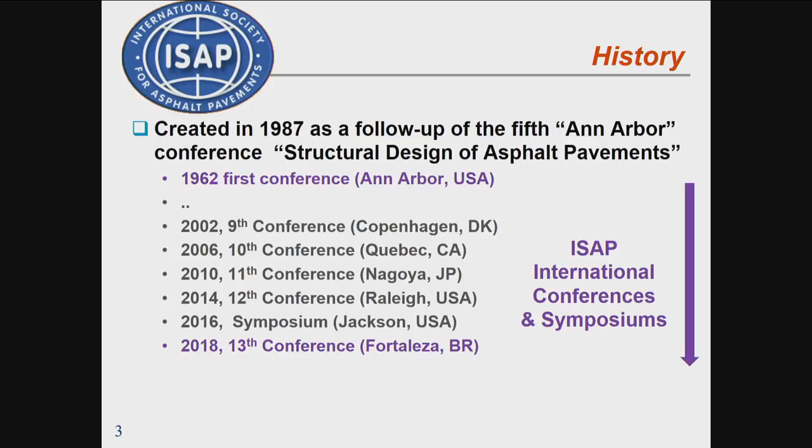These are events, sort of like the Olympics, every 4 years, or like the Soccer World Cup. But there are also some symposiums in between. The last conference was in Fortaleza, Brazil, and the next one, a symposium, will be in San Jose, Costa Rica.

That will be in 2021, not in 2 years. If you want to know more, we can discuss that later. Then there will be the 14th conference in Montreal, Canada. So as you can see, over the years this conference has been to Europe, US, North America, South America, and Asia. It's really covering the globe, and maybe one day Africa, who knows.

So a bit about the mission: it's to encourage research and technology exchanges in the field of bituminous materials and structures. There are a number of things around this.

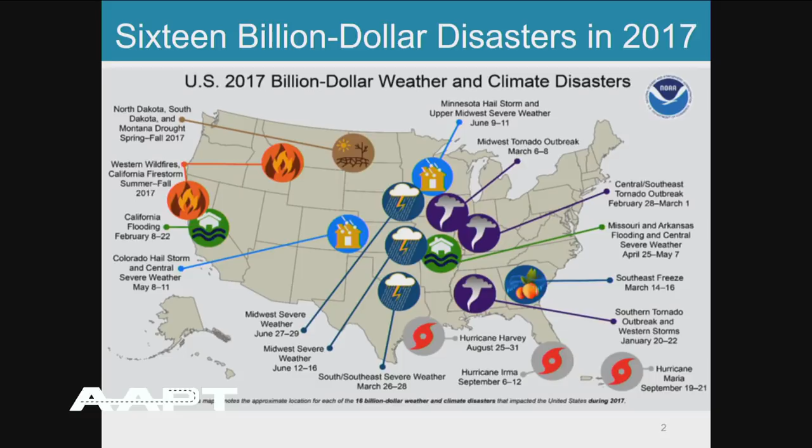It's not earth-shattering that we all know that environment does impact our pavements. This is something we've known for some time, and a recent study data mining the LTPP database found that 36% of the damages was attributed to environmental features. So when we design pavements, we do consider the environmental parameters. However, in the past, we've always assumed that this is a historical trend and it's been pretty constant. And in the future, we're finding that this trend may not be true.

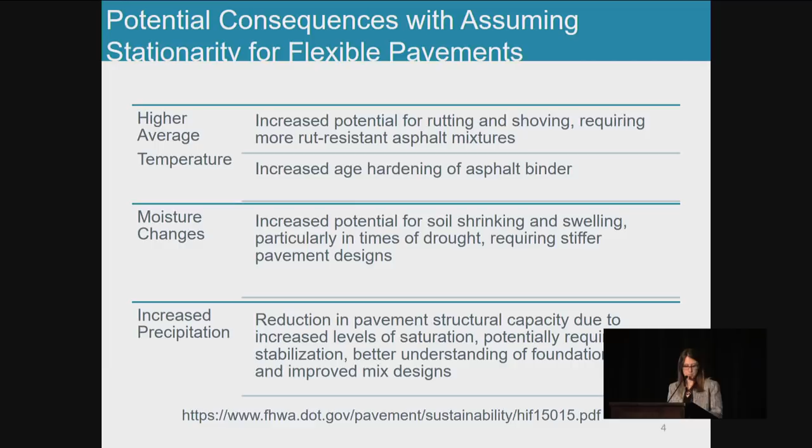If the climate were to change drastically, and our assumption that these historical climate trends were not flat and consistent, considering the lifespan of the pavement, with higher temperatures we may see some more rutting. With moisture changes, we may see issues with soil shrinkage and swelling. And then with increased precipitation, we may need a stronger base or foundation because we may lose some structural capacity for our pavements. So here's just a few issues we could expect if our climate changed drastically.

In this presentation, I'm just going to go briefly over FHWA's resiliency program and policies to give you an idea of what we have in our policies right now, identify some of the available resources that are out there for you all to use and share, as well as highlight some future ongoing projects specifically related to pavements.

So starting with our program and policies, FHWA's Planning, Environmental and Realty Group is really who manages the resiliency program. But resiliency is well immersed in not only our strategic plan — the strategic plan at the DOT level says that we should increase the effectiveness of ensuring that our infrastructure is resilient enough to withstand extreme weather — but it's also in an FHWA order, and that order says that all of FHWA should incorporate resiliency into our program when we consider program funds, projects, and research.

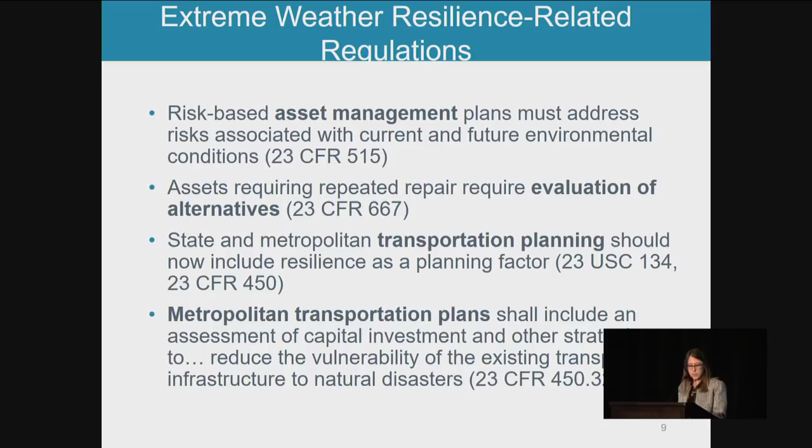Not only that, the resiliency and consideration of future environmental impacts is also in our regulations. The most current regulation that has incorporated future climate is the asset management regulation, which requires transportation agencies to put forth a transportation asset management plan. In that plan, you must not only consider the risks that climate could pose, but also include that in your life cycle cost for managing your assets, and pavement is one asset you must look at. When you consider the various risks, there could be an immense list of them, including political changes, but climate is also called out in the regulation as something agencies should consider moving forward.

As a result, the Office of Environment and Planning has developed a program to integrate resiliency into transportation projects. They're looking at it from a holistic point of view, wanting to integrate resiliency not only into the planning, but also the project level, design level, as well as operation and management. There's a lot of resources, and a big team that works on how this should be done.

From the planning level, they're creating a guideline for agencies putting together plans to incorporate resiliency into their approach. They have found that it's important to identify and call out resiliency if you want success incorporating it into your program. They're also looking at asset management, specifically the transportation asset management plans that all states are required to submit.

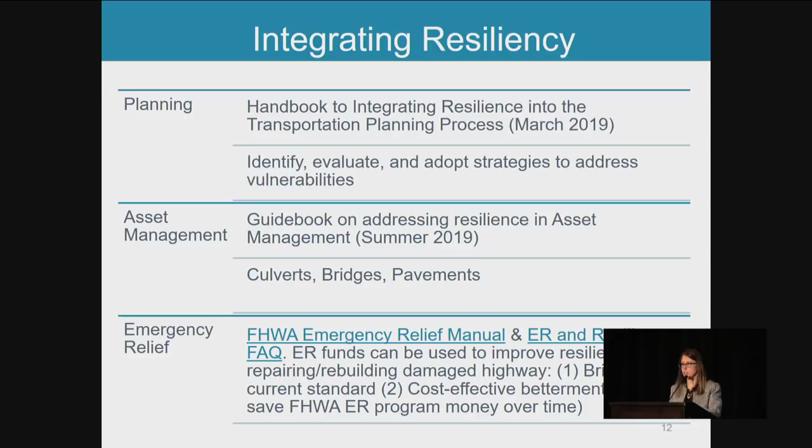All of these projects I've mentioned are spread across the U.S. They have worked in various regions and conducted various pilots, so I encourage you to check out the resources available on the website if you want to dive in deeper. Moving forward, I'd like to highlight some pavement resources specific to asphalt pavements, spanning from case studies to tools as well as guidance.

The first set of resources were case studies conducted across the United States. There were several case studies looking at how to incorporate resiliency into the project level or engineering design. There are two case studies I'm going to highlight focused on pavement type issues: one done here in Texas, and one in Maine.

The main lessons learned in Maine: they did a vulnerability assessment of their assets and identified that the future climate would likely be warmer with shorter winters. This is important because Maine had higher load premiums for trucks in the wintertime due to extra strength from frozen ground. They found they were very vulnerable to changing temperatures, as this season was getting shorter, meaning they might have to get rid of this premium. If they didn't, it could cause damage to their network, but getting rid of it would also have a huge economic impact on the trucking industry there. That's what they found out in the Maine study.

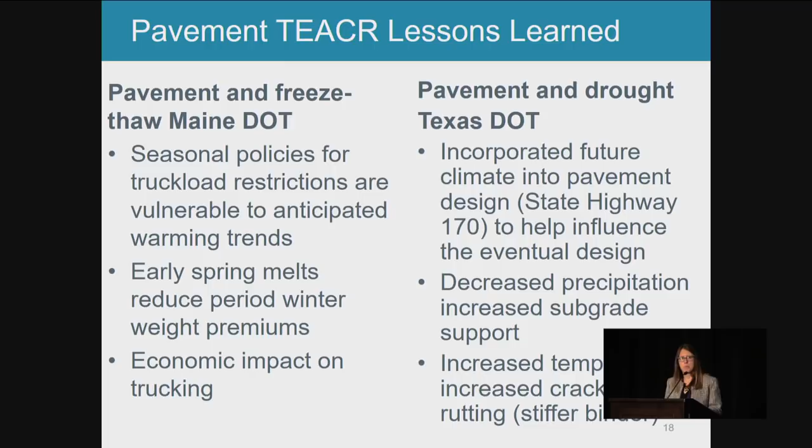They also found that temperatures would increase, and particularly for asphalt pavements, they found that you may want to use a polymer binder that's more resistant or flexible for the higher temperatures. When looking at this from a network level versus a project level, they were pretty happy because we have technologies that could meet the needs of the future climate, and they're available. There's no learning curve, and the cost isn't that much more.

However, at a network level, they did say that the cost could be significant for a DOT adapting these strategies network-wide. So what can a DOT or agency do?

The first thing we suggest is to monitor your trends. We're lucky that most environmental changes don't really impact pavements within the current lifespan, but we are moving to designing longer life pavements. As we move forward with longer life pavements, that may no longer hold true. In monitoring these trends, if you start to identify certain environmental distresses occurring when you wouldn't expect, we may need to look back at our assumption that historical climate trends are remaining constant.

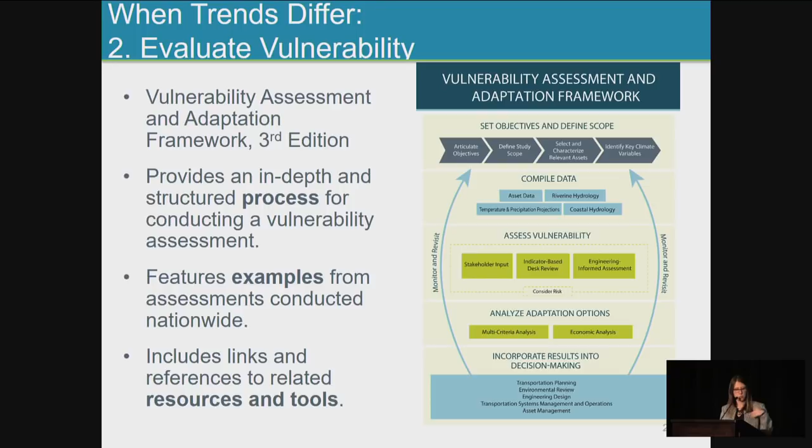One way to evaluate your vulnerability is FHWA's Vulnerability Assessment and Adaptation Framework. It's not just a framework of step-by-step procedures, but it does highlight various tools and resources along the way as you evaluate your network. Some of these tools I will highlight further on in this presentation.

The Vulnerability Network Assessment, oops. I guess you can't, okay, here we go.

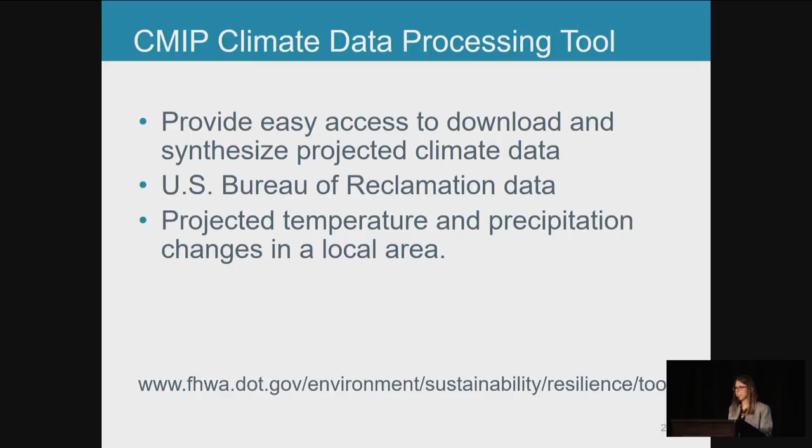Within this assessment, one of the tools it highlights is the CMIP Climate Data Processing Tool. This tool basically data mines from the U.S. Bureau of Reclamation climate data and synthesizes it to the local climate data you could expect for pavement designs. It takes two parameters to get the projected temperature as well as precipitation for your local area, and those future predictions are what you could expect.

In addition, another tool the Vulnerability Assessment Framework mentions is the Vulnerability Assessment Scoring Tool. This tool is an indicator-based vulnerability assessment to help you prioritize your potential vulnerabilities based on your various assets. So it lets you organize what is the most vulnerable area and what is a little bit stronger that you don't have to worry so much about.

If you were to determine that your pavements are vulnerable to future conditions, you need to look at different solutions. FHWA has another tool that helps DOTs with this, called the Adaptation Decision-Making Assessment Process. This is a risk-based approach that looks at life cycle cost, political and regulatory constraints, as well as resilience, letting you look through all of these to figure out which approach would be best for the solution moving forward.

In summary of all these resources, there is a public roads article co-written between the Office of Infrastructure Pavements Group and FHWA's environmental group. It's called Boosting Pavement Resilience, the same as the title of this presentation, that I encourage you to go read, and it will provide links to the resources I mentioned, as well as the Sustainable Pavements Program's tech brief specifically on climate change impacts to pavements. So those are two resources you can reference.

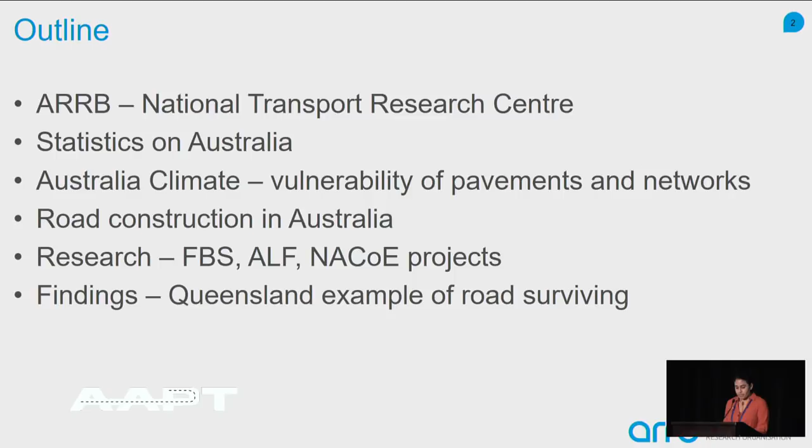The Australian Road Research Board, we're primarily a research organisation. We do some consultancy work. We try not to just sit behind our desks, but get out there and disseminate our knowledge through presentations like this, workshops. We create manuals, we do webinar programs. We also do demonstration and pilot trials. We work in the urban and rural space with all things to do with road transport - sustainability and resilience, structures, network design, autonomous vehicles, asset management, safety, all the important topics. We also have a range of data collection vehicles that go out onto the roads every day, including our integrated system vehicles such as the iPave and ISAP, which are the pavement and surface collection vehicles.

We've actually got offices all around Australia. I'm from Melbourne, which is our head office, and we've just recently moved into a new research facility, being dubbed the National Transport Research Centre.

Here we have world-class laboratories looking at materials research, so it really gets down to the crux of it. We test all the road materials from pavement, asphalt and bitumen. In Melbourne we also have the accelerated loading facility, which there'll be some pictures of later, and at the moment we've got foam bitumen stabilisation testing happening there.

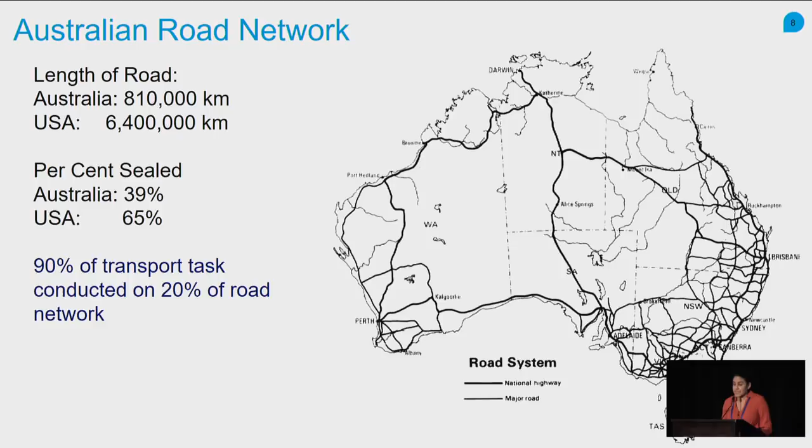The current climate challenges we're facing on our roads include temperature changes. In 2018, the Bureau of Meteorology reported this was our 3rd hottest year on record in the past 10 years, and it's only projected to get hotter with extremely fewer cooler days.

We've also got variations in rainfall, which is one of the biggest influences on our country. We're seeing a trend towards wetter, longer wet seasons, especially across northern Australia, while in central and south Australia we're seeing a lot more dry, high fire risk days and of course drought. With the increased rainfall in the north, we're getting flooding, and it's easy to say this is the most expensive hazard we face in terms of building resilient roads. Climate change scenarios predict floods will only get more intense and more frequent over the years, so it's definitely a key area for us in improving our adaptive capacity.

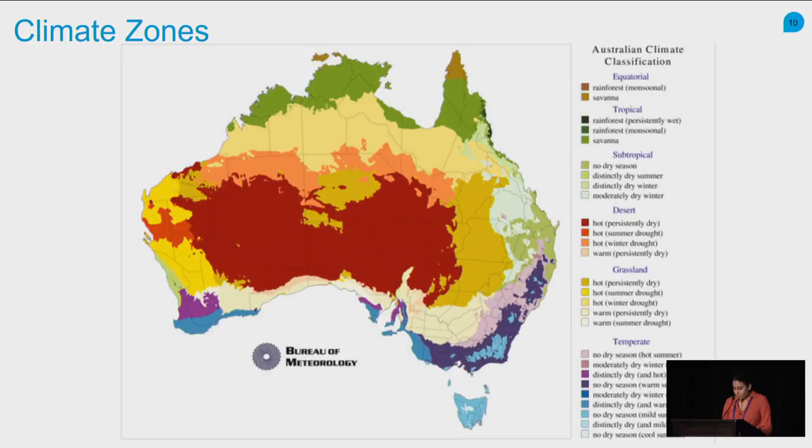We're in fact a case study itself for other countries to consider in terms of climate analoguing. For example, countries with similar hazards are interested in what we're doing as a country in terms of adapting to these impacts. But to be honest, I think we've still got a lot to learn from international sources as well.

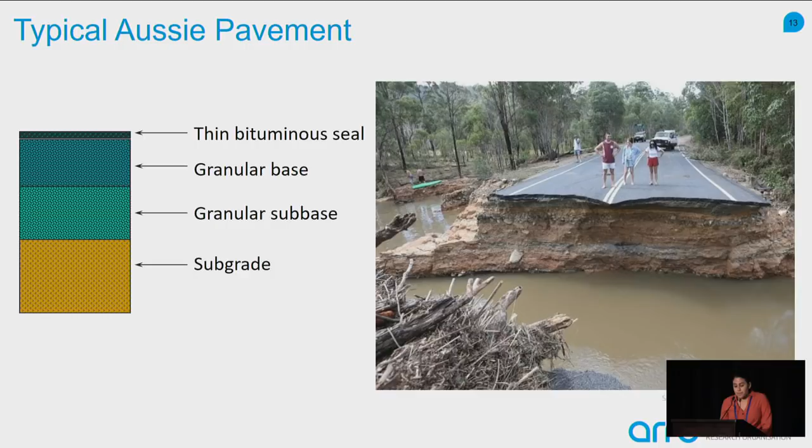The extreme challenges affecting a nation are the ones that occur at the same time. We've also got a low network density with large travel distances from our mines, farms, ports and cities. We've got densely populated urban areas, and on top of that heavy loads with low traffic volume. I forgot to mention earlier that 90% of our transport only occurs on 20% of our network. So although we don't have high volumes of traffic, we do have heavy volumes in certain areas, and we predominantly have light pavements as well.

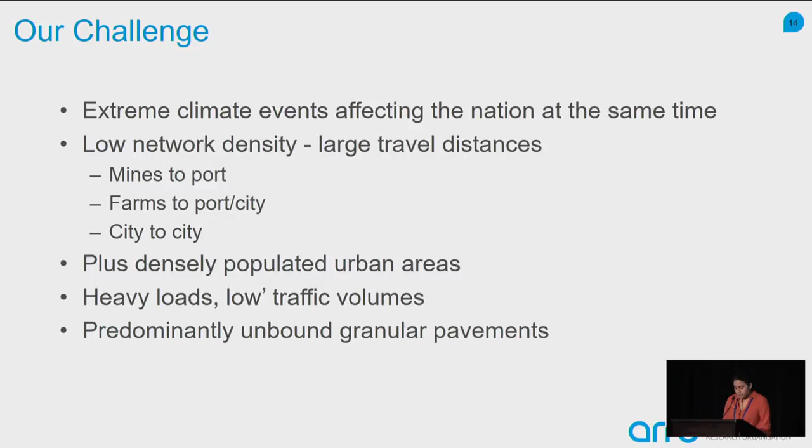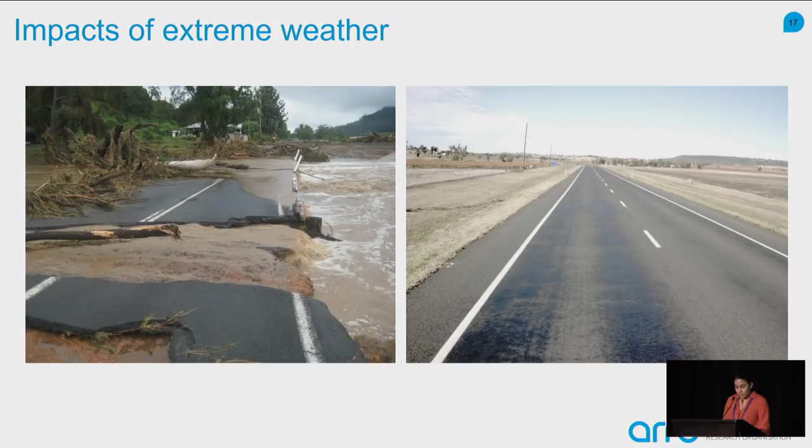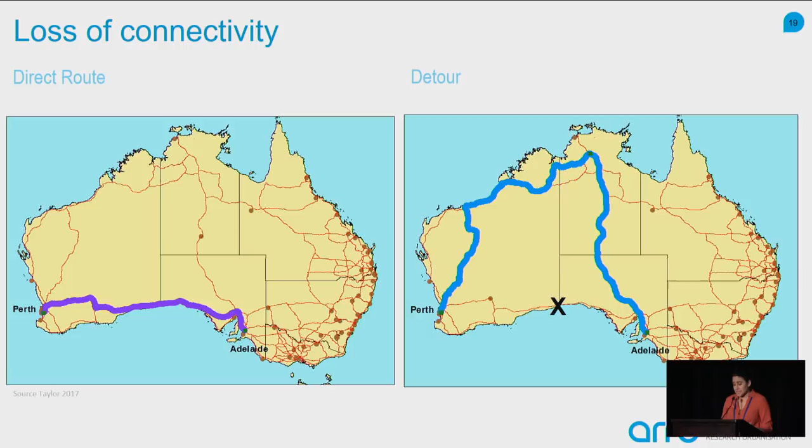So how do we be more resilient, and how do we better cope with our extreme weather events? As Heather discussed and gave a really good introduction, we've got to take this holistic approach to things.

So we've got your planning and design. You want to consider material selection, make sure we're using fit-for-purpose materials more and more. We've got material specifications - from an Austroads perspective, we're slowly making a move towards more performance-based specifications. And then there's also the next generation materials, monitoring and modelling, and a lot of life cycle analysis, which we've just heard about, which I won't be going through today.

To help with this, to build professional capability and of course savings from our road expenditures, we have initiatives such as the NACO program, which is the National Asset Centre of Excellence. This is a collaboration between ARRB and one of our state road authorities in Queensland. This program strategically targets road infrastructure related research through a multi-year committed resource program, and I'll be showing some of the results from some of those projects today.

So just as a quick example of one of those projects, here we've got some research done by ARRB under the NACO program that coordinated route-based upgrades such as the ones you can see in this picture here. The Bruce Highway is one of the critical links along our east coast, but it's regularly cut off by floodwater.

So in 2015, the Yeppen floodplain was upgraded to be elevated about 3.5 metres higher than the old road, creating a contraflow together. As you can see here, this photo was taken in 2017, and you can see it's performed really well. So when the flood happens, the elevated road is able to act as a two-way road and still keep that connectivity there.

So we've also got things like, in terms of planning and design, the climate adaptation frameworks, which we use to help us with extreme events. Following on from what Heather said, we're strong believers in using international findings and adaptations. So we're currently undertaking research into how the PIARC framework here, along with some other frameworks used on a more local base, can be adapted to Australia-specific climate risks.

This guide was developed for authorities to identify relevant assets, climate variables, prioritising risks, developing robust adaptation responses, and integrating the findings into our decision-making process. The framework also provides that life cycle interactive approach to climate change and adaptation, which is very important in terms of that whole life process.

So now looking into some of the research we do at ARRB. Here I have an example of some granular materials that are commonly used throughout our pavements in Australia, and they are quite often moisture sensitive materials. So you can see from the graph that these materials are a function of the moisture content at the time of loading.

We're seeing an increase in deformation with the increased moisture content, so we can tell when we need to intervene with our resilient pavement structures. This graph was generated using our extra large wheel tracker, which is in our laboratory in Victoria. This method was also compared and assessed against a full-scale ALF testing and showed some fairly good correlations.

The reason we do these moisture tests is that moisture-related pavement failures is obviously one of the most common failures we see in Australia, especially in northern Australia with the flooding, and therefore it's really expensive to repair. As an example, I think Heather said that $16 billion was spent repairing roads last year across the whole country. We just had $6.4 billion spent in one state of Australia repairing our roads in 2015, with 50% of these costs just going to the pavement.

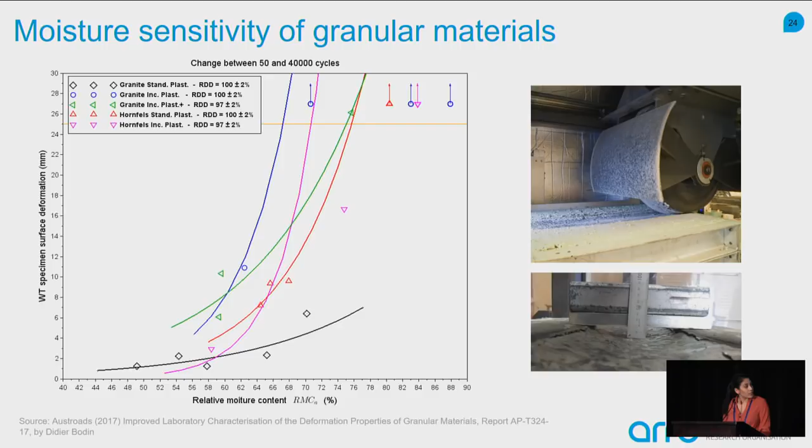Moving more into the selection and design space, in an urban and semi-urban environment, we know that asphalt and bituminous materials can deliver good resistance to water and recover well from flooding, especially, but only if they're properly designed and constructed. The use of materials such as polymer-modified binders can also reduce the risk associated with increased pavement temperatures.

One example of material selection which gives us resilience in roads and also a lower cost to our community is the use of EME2. This material gives us increased structural capacity and a high resistance to rutting in warm climates, and can also be built in thinner layers, therefore giving us our cost savings.

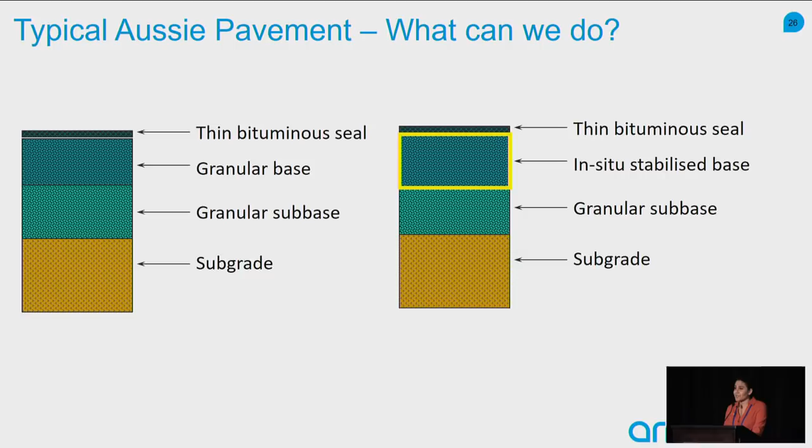So I'm going to focus a bit more on FBS. As I showed you before, we have the typical Australian pavement structure, which is your granular base with your thin bituminous seal. But in comparison, to build a more resilient road we can create stabilised bases using in situ stabilisation. Although I'll be focusing on foam bitumen stabilisation, it's important to note we don't just look at that - our NACOE program actually looks at cement stabilisation, lime stabilisation, and also recycled additives like fly ash.

As part of the ARRB and Austroads research program in Australia, we've got research currently underway developing significant improvements to the laboratory-based mechanistic design methods used for cost-effective materials such as foam bitumen stabilisation. Using the accelerated loading facility, we're testing full-scale FBS pavements and recycled materials. The first phase of our testing program confirmed good rut resistance in warm conditions, and we've got a second phase currently being undertaken which is assessing the resistance to fatigue cracking.

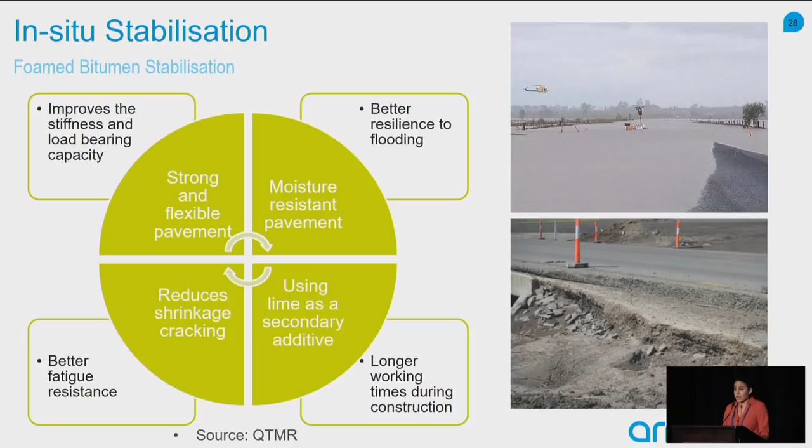You can see in the picture underneath how well the foam bitumen has actually held up compared to the shoulder, which was a granular material - it's completely washed away. So in terms of being time saving and money saving, it helped us from the get-go there. From what I understand, after just a little bit of drying time and reconstruction of the shoulder, they were able to continue with the construction. I think we can agree that if it was an unbound granular material there, that road wouldn't be there after the flooding, especially during construction.

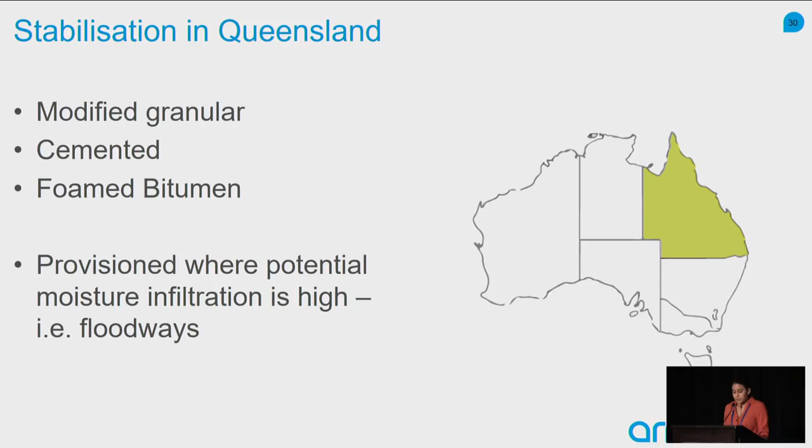So I'm just going to go through a case study now from Queensland.

Following the 2010 to 13 floods in Queensland, there was a transport network reconstruction program undertaken to help repair the road network. ARRB, as part of the NACOE program, undertook work looking at the application of the pavement technologies and treatment options that were used as part of this program.

There were sites along the cyclone path, which I can't disclose with you today, but there will be a report hopefully published soon that will show those specifically for those that are interested. We had 9 sites that were looked at as part of the before and after of Cyclone Debbie that were foam bitumen stabilised, or even just plain bitumen stabilised.

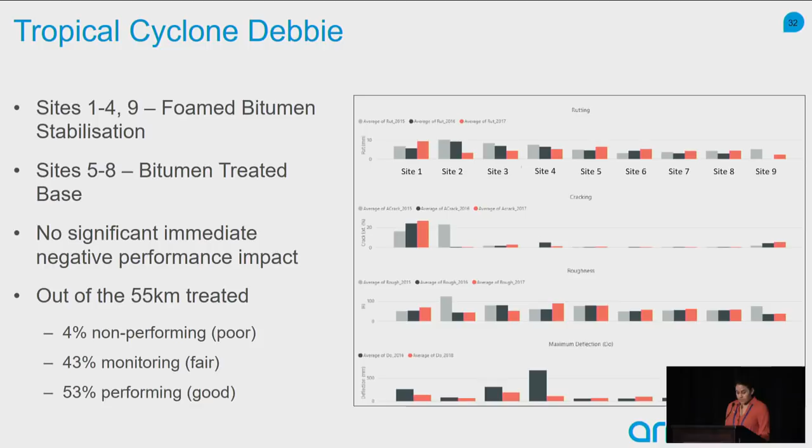So I think we've got some really positive examples of what's happening in Australia, and we've got a lot to learn still in terms of resilience. So any recommendations or comments are welcome. Thank you.

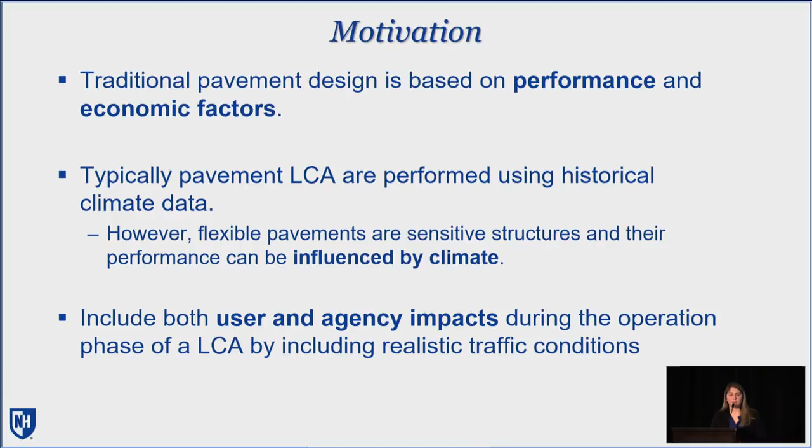We want to take it one step further and not only look at the effects of future climate during the operations phase of our LCA, but also look at the breakdown of user and operation costs from both an agency and user perspective with the inclusion of realistic traffic data.

Our first study objective was to perform an LCA on a section of interstate with the inclusion of realistic traffic data or realistic traffic conditions, the inclusion of future climate data, and then look at various maintenance and rehabilitation strategies over the service life of our roadway.

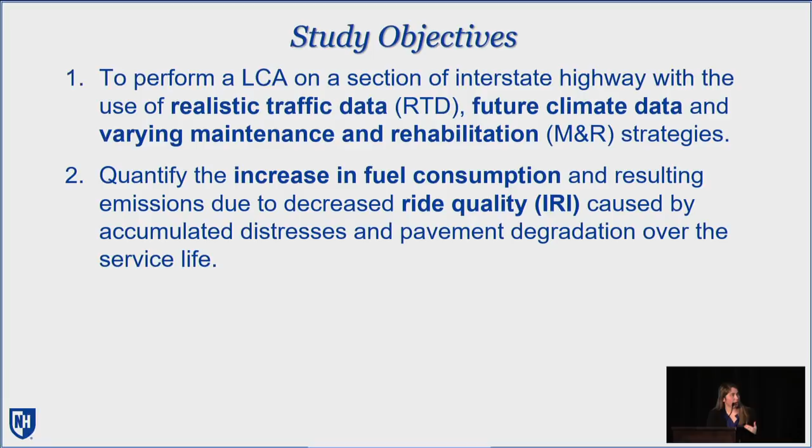Our second objective was to quantify the increase in fuel consumption due to a decrease in ride quality. We used IRI as our pavement condition index for this study, and IRI deteriorates, as we know, with time during the service life of our roadway.

Our overall outcomes from the LCA that we evaluated were global warming potential, cumulative energy demand, and life cycle costs.

A brief background to make sure we're on the same page in terms of some of the terminology I'll be using throughout the presentation. An LCA is simply a technique used to evaluate both the environmental impact and the cost associated with a product over its design life through its various stages.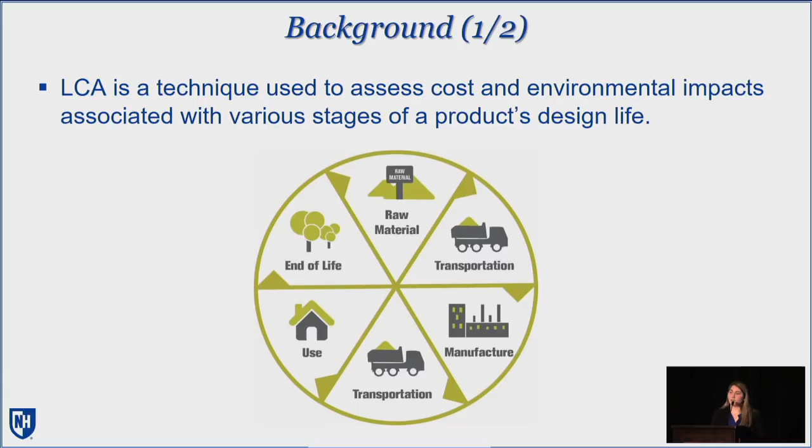For a pavement, an LCA typically includes the excavation of raw materials, the transportation to your plant for production, the transportation once again to the site for construction, followed by your use, or operations phase, which makes up a significant component of your LCA, and then followed by your end of life. End of life for a pavement can be challenging to define, because asphalt is one of the most recycled materials in the US, and it's constantly being overlaid, so it can be challenging sometimes to draw that system boundary.

I'm sure most of us are familiar with the International Roughness Index, typically reported in inches per mile or meters per kilometer. The figure shown here highlights an example of a performance curve, where if we optimize the timing of our maintenance strategies while the road is still in relatively good or fair condition, we may save more resources and money in the long run than if we allow the road to degrade to a poor or failed state and have to reconstruct.

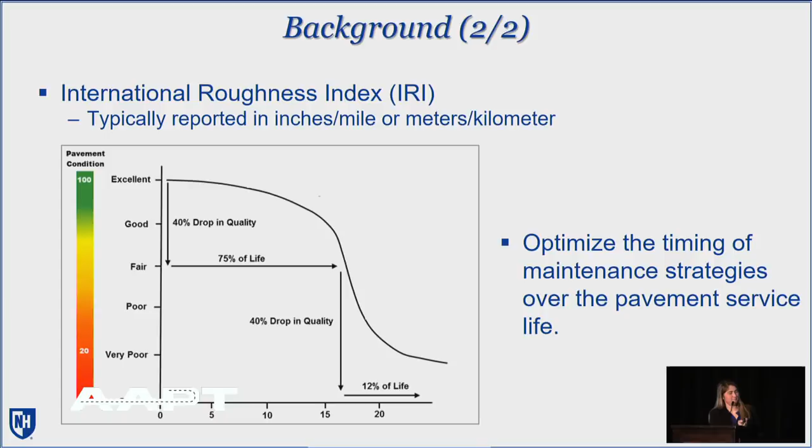So I'd like to start with a general overview, and then go into more detail on the methodology and how we incorporate future climate data as well as realistic traffic data into your LCA framework.

The first step, we needed to select a case study location. We chose a 16-mile stretch of I-495 located just outside of Boston, Massachusetts. We assumed that our baseline conditions were that all vehicles travel at steady state during the service life or operations phase of the LCA, and that no maintenance or treatment was done during its service life.

Our second step was to perform an inventory. We needed to collect information on material properties, climate data, traffic volume counts, vehicle classifications, and also establish our pavement structure.

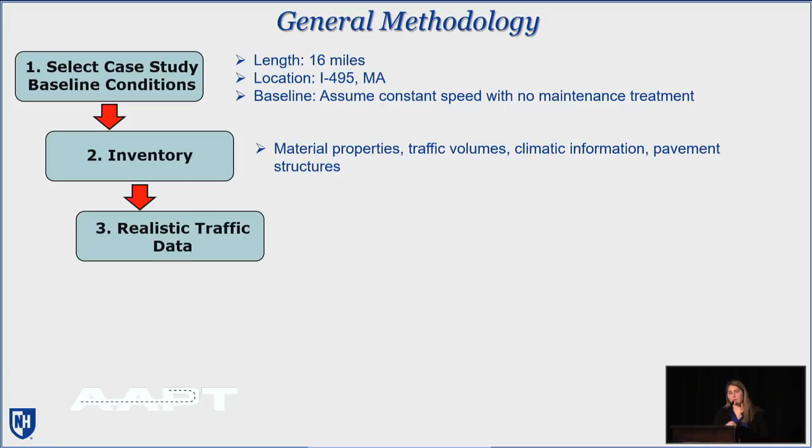The third step was to incorporate realistic traffic data. There was a bit more data mining involved, and we used a combination of Google Maps to generate our trip times and delays. Whenever you plan a trip on Google Maps, it gives you an estimation of the total duration to get to your destination from point A to point B, but it also gives you a color-coded map, going from green, orange, red to dark red. Using that, we can get an estimate on whether you're traveling at the appropriate speed limit, or sitting in traffic bumper to bumper in a dark red zone.

The next step was to run Pavement ME to generate our pavement distress and develop our IRI curves. We looked at a combination of 5 different cross sections and were able to generate those performance curves.

Our last step is to combine all of our results and give an LCA impact assessment in terms of global warming potential, cumulative energy demand, and life cycle costs.

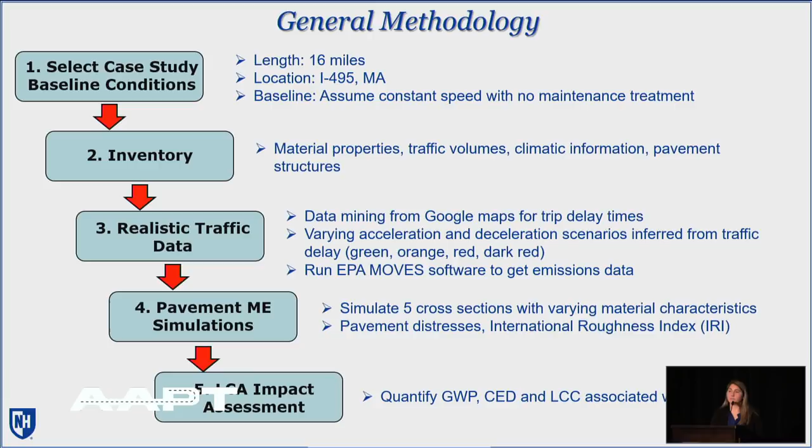That data was on a daily basis, but for those familiar with Pavement ME, it requires hourly data in order to run your simulations. So there's a few more steps in this process. The first was to take your daily max and min temperature and convert that into hourly increments, using a process developed by Valle et al. in 2017. We also needed to split the total precipitation into hourly increments for Pavement ME's input.

Now's a good time to mention some of the limitations and assumptions from using this data as part of this study. The first is that this database only covers up to the year 2099, so when performing an LCA that might extend beyond that time frame, you're now extrapolating from those projected models. A second limitation is that there's really limited IRI performance data out there on the effectiveness of different maintenance and rehabilitation treatments considering future climate data.

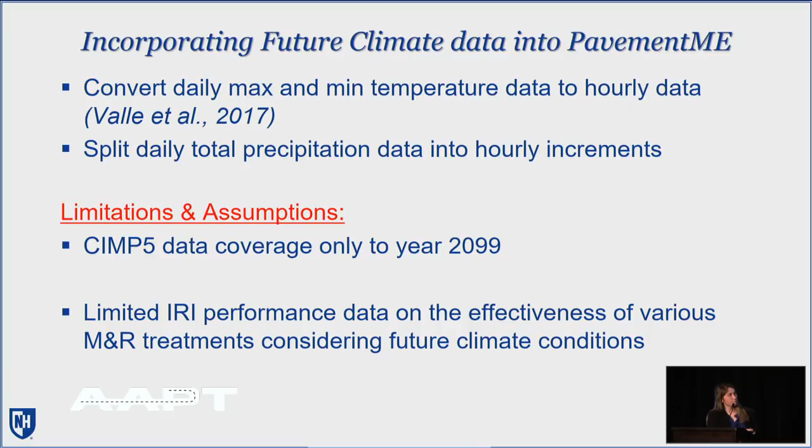By that I mean, today we might know that doing a microsurface might improve our IRI by 45 inches per mile, but is that also going to be true under future climate conditions? That's an area that certainly needs to be explored further to know whether that holds true or not.

So shifting gears from the future climate data to the incorporation of real-time traffic data, there's really two major components to your operations or use phase of your LCA. You have your agency impact, and you also have your user impact. And so to start, we'll look a little bit at how we incorporate realistic traffic data into the framework.

So we want to try to simulate realistic driving conditions, and to do that, we used a combination of Google Maps to generate those trip times, as well as to determine our congestion. And then we used Mass DOT's transportation data management system to collect information in terms of traffic counts, vehicle classifications, things of that nature.

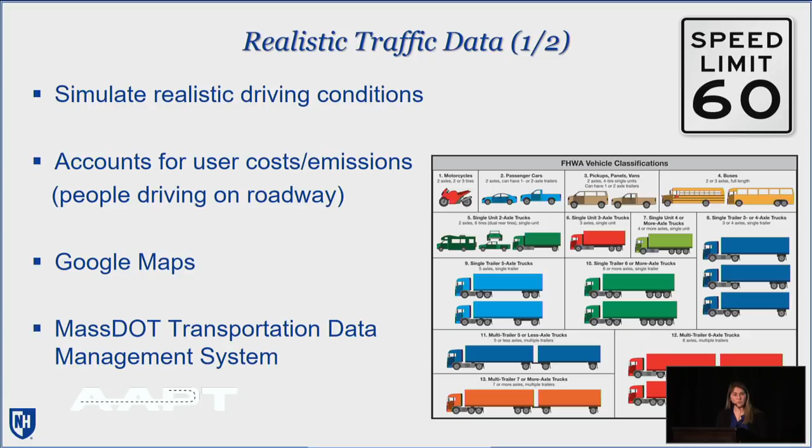We then used that information in combination with EPA's MOVES, or Motor Vehicle Emission Simulator software, to generate our global warming potential and cumulative energy demand as a function of IRI.

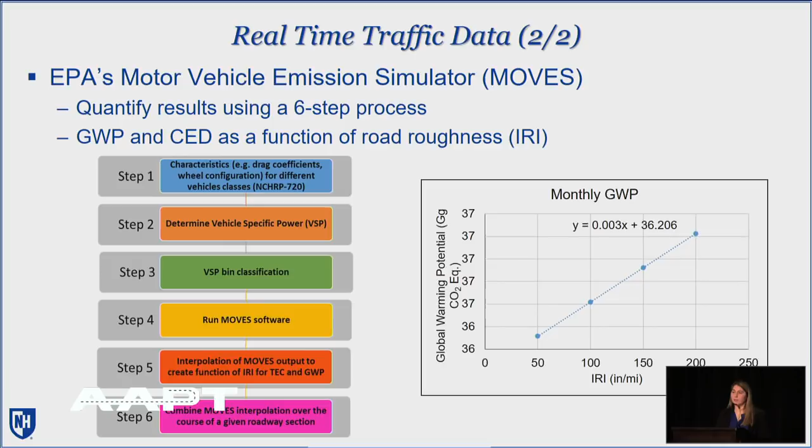I'm not going to spend a ton of time walking you through, but the steps we followed a 6-step process here on the left, where really we looked at determining your vehicle-specific power, and then using that to run through EPA MOVE software to get our global warming potential and our cumulative energy demand as our output, and then developed a function in terms of IRI that we could then apply to our different scenarios.

As I mentioned, the second major component to your operations phase is your agency impact - so what maintenance and what rehabilitation treatments are being applied during the service life of your road. For this study, we looked at a combination of microsurfacing, cold-in-place recycling, crack sealant, and mill and overlay.

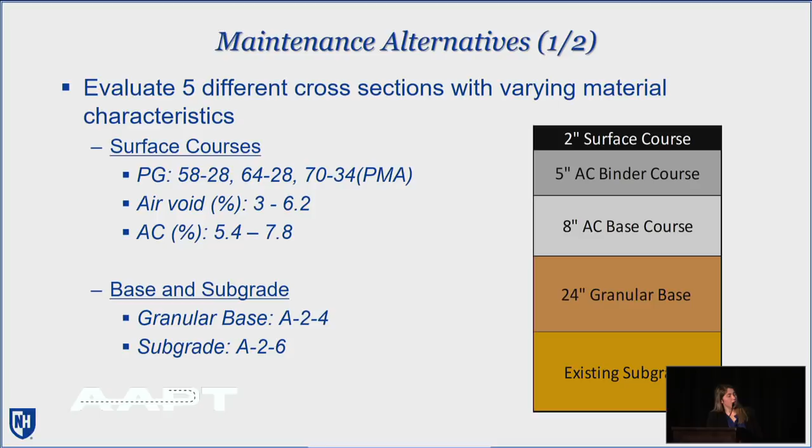In the study, we evaluated 5 different cross-sections. Shown on your right is a representative cross-section of what we simulated in Pavement ME, where we held the substructure and base layers constant, but what varied was that surface course, and it varied by material properties such as PG grade, air void, gradation, asphalt content, and so on.

So we used a combination of Pavement ME to generate our IRI, or our performance curves, as well as doing some literature review on the effectiveness of those different maintenance treatments during the service life to develop each set of curves. So the 6 different scenarios that we looked at, the first one was a do nothing and reconstruct,

meaning that you build your road, you allow it to degrade to your terminal IRI, which we selected as 172 inches per mile, which is also Pavement ME's default value. And then you would reconstruct once that threshold value was reached, and that process was repeated.

The next scenario that we looked at was crack sealant, where you would go out and crack seal every 2 years until your terminal IRI was reached, and then you would reconstruct. Through literature review, we found that by performing the crack sealant treatment, you're able to extend the service life of your roadway by approximately 2 years.

The next alternative that we looked at was microsurfacing, and we had 2 different trigger or timing values on when to apply that treatment. So we looked at whether it was done at a 140 inch per mile or 160 inch per mile threshold. We also looked at cold-in-place recycling and a 2-inch mill and overlay.

I'd like to just note that for the analysis period and how we determined when we would stop the maintenance cycles, we wanted to have a minimum of 3 full cycles for each cross-section be performed. So we want to allow a substantial amount of time to be able to make a fair comparison among the different alternatives.

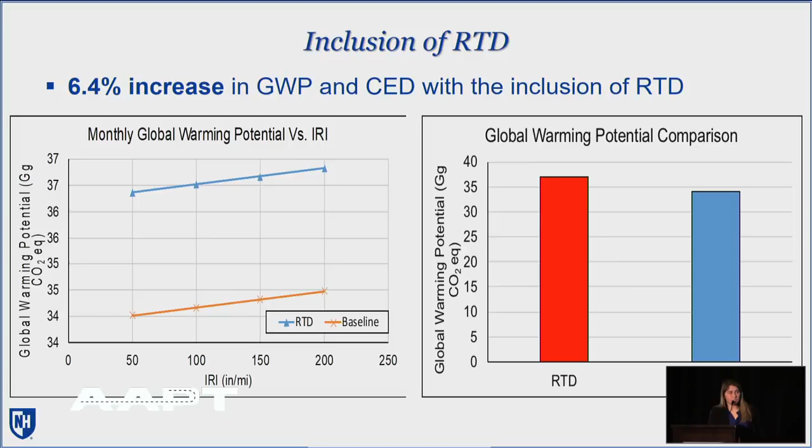Shown here is, from an agency's perspective, the maintenance and rehabilitation cost comparison. This is all in net present value with a discount rate of 4%. The color coding: green denotes our most economical option and red is our least economical option. The top table is the analysis using Pavement ME's historical climate data to generate the curves, and the bottom table is using future climate data.

You can see that in general, from the 2 different tables, the ranking of the different maintenance alternatives is consistent - mill and overlay is our most economical choice, while do-nothing-and-reconstruct is our least economical. But what's different, if you look closer, is the average percent difference in net present value; as you go from the left percentages to the right, using future climate data, that value has increased, all with respect to the most economical option, the mill and overlay.

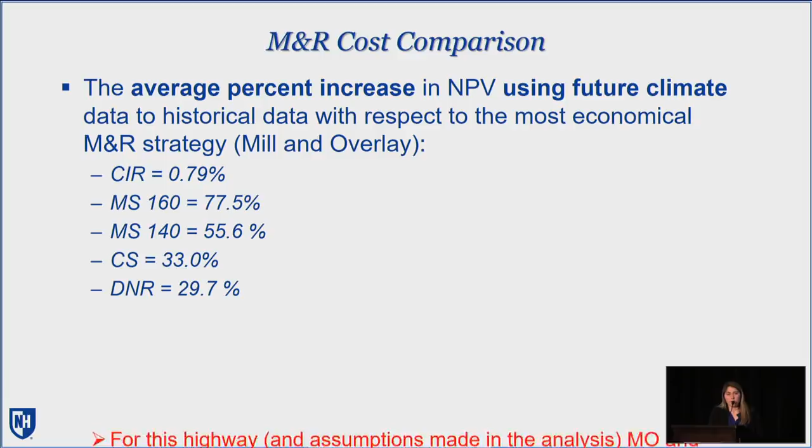To really drive home that point, if we look at just the average percent increase in net present value when using future climate data compared to historical climate data, you can see those percentages are increasing. I'll say this with a caveat that we might be able to draw the conclusion that for this highway and the assumptions made in this analysis, the mill and overlay or the cold-in-place recycling could be a more resilient maintenance alternative compared to, say, microsurfacing, which increased by about 77% in net present value when using future climate data.

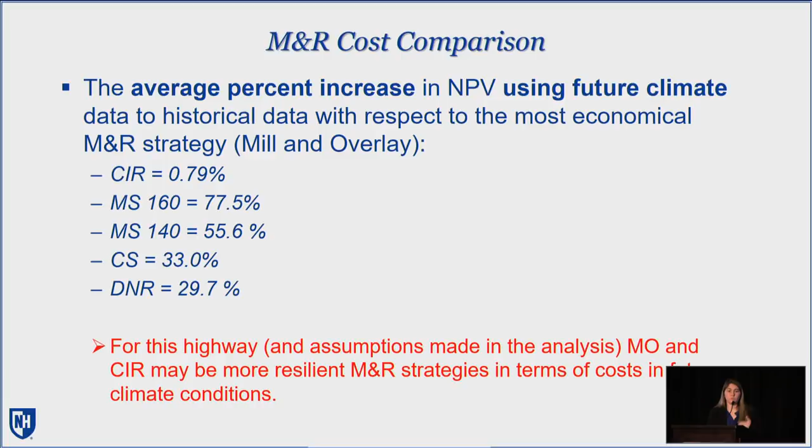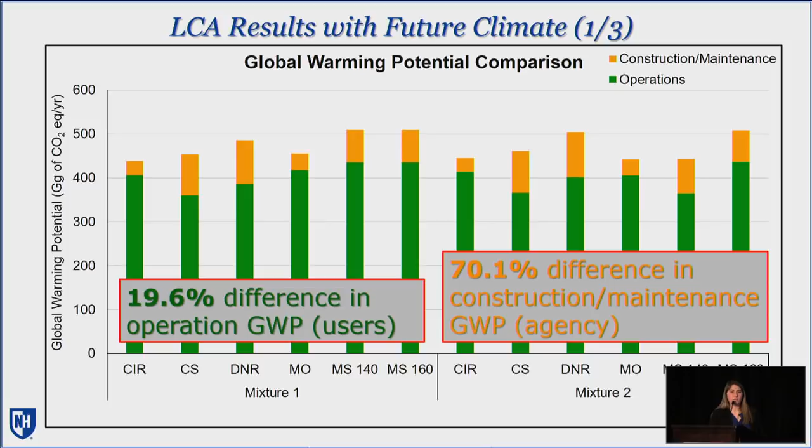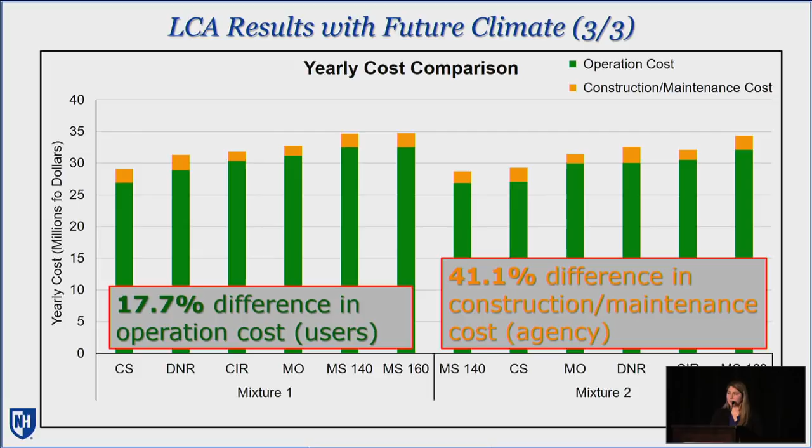Lastly, looking at the yearly cost comparison, once again dependent upon which type of maintenance treatment and which cross-section, it varies. One takeaway from these plots is that the green portion of the bar, accounting for user costs and impact, is significantly larger than your agency cost or impact. So it's important to look at both and not just focus on agency costs when planning. If we optimize from a user's perspective, you can see about a 17.7% difference in yearly costs, and from an agency's perspective, up to about a 41% difference in agency costs.

So in conclusion, one of the first takeaways from this study was that including realistic traffic data does matter, does have an impact. We saw with this given set of traffic and case study location a 6.4% increase in global warming potential.

and cumulative energy demand. We also saw that incorporating future climate data has an impact on those IRI curves as well as the frequency of when treatments are required or applied. We can see up to an 8% increase in users and a 38% increase in agency impact

in terms of GWP or CED when using future climate data rather than historical climate data. In general, we saw that the ranking of those maintenance alternatives were consistent. The mill and overlay was consistently our most economical choice, while do-nothing-reconstruct was our least economical choice. But when you look a little closer, the gap between which option is best is increasing when using future climate data.

And then lastly, when you try to optimize your pavement structure as well as which maintenance type and timing, there will be a trade-off between user and agency in terms of cost as well as environmental impacts. So it's really important to step back and look at both perspectives, especially where users are contributing a significant portion during the operations phase of an LCA.

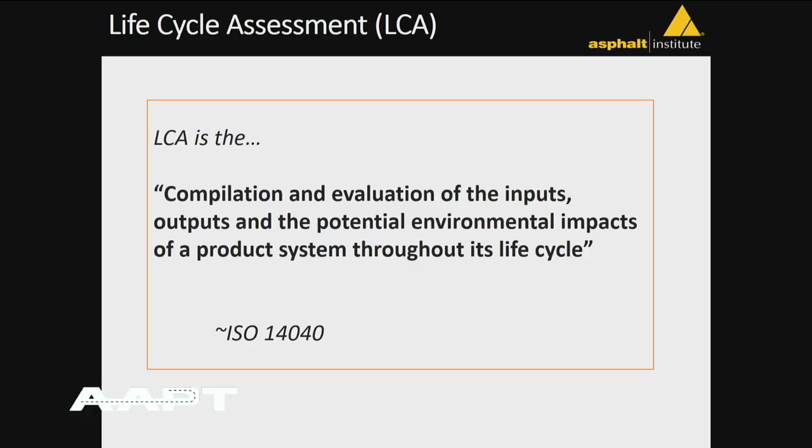Of course, a quick definition of LCA - probably don't need to throw that up there. Katie did a very good job talking about LCAs, looking at the inputs and outputs and the potential environmental impacts of any particular product. And of course we look at life cycle data for asphalt, and why do we want to do that?

This was a decision we had to make as an Asphalt Institute, saying there's other studies out there, there's LCAs out there. Katie had to get information from asphalt from somewhere to use in hers. But why would the Institute want to do that? Well, first off, we wanted to make sure we provided up-to-date and accurate information, and we had the ability to get actual information from our refining members that produce asphalt, where most of these other studies weren't able to do that. And we wanted to be able to support defensible competitive claims.

It's certainly a heated environment out there, especially in the environmental arena between the concrete industry and the asphalt industry. The concrete industry spent a ton of money up at MIT to try to disparage our product, and we want to make sure we had the most accurate information out there and something we could certainly defend.

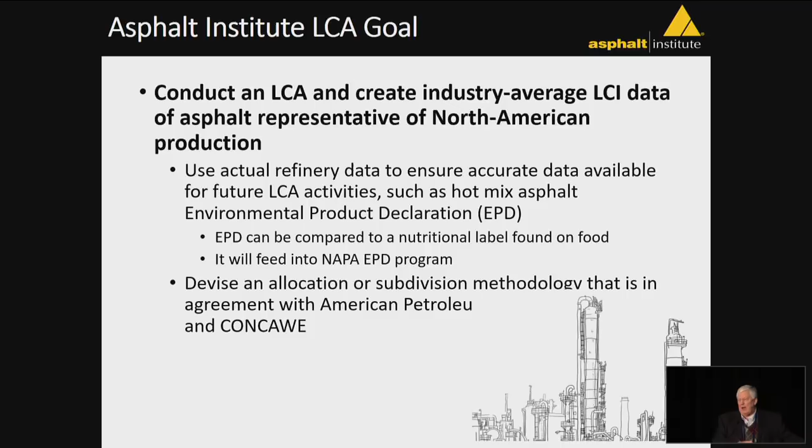If you look at refineries and all the products coming out, asphalt's certainly not the predominant product. And at some point in time, API is going to have to do an LCA on all of the other products in their refinery. And if the methodology for the majority of those products in that refinery stream don't agree with the one the asphalt industry had, then that makes us really open for attack by our competition.

And we knew that Eurobitume had a methodology that they used, and the European equivalent of the American Petroleum Institute, Concawe, did not agree with Eurobitume's approach. So we were trying to get an approach that not only here in the United States had agreement with API, but also had agreement across the water with both Eurobitume and Concawe.

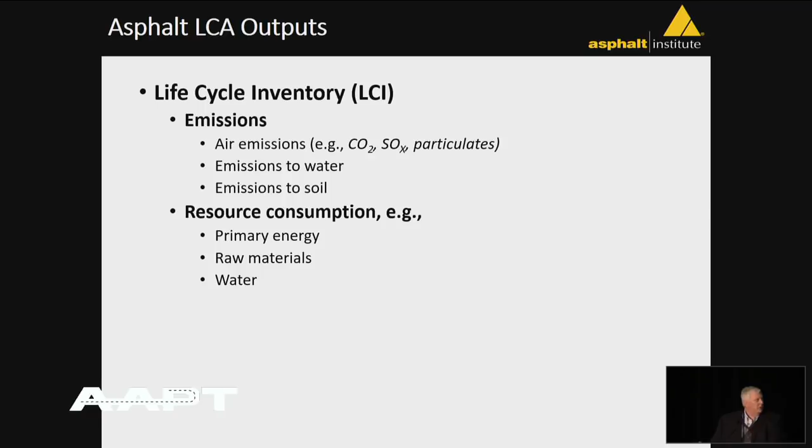So if we look at the outputs of the LCA, of course we're looking at life cycle inventory, we're looking at emissions, we're looking at resource consumption and waste. When we look at the categories here, primary energy demand, and of course the impact assessments.

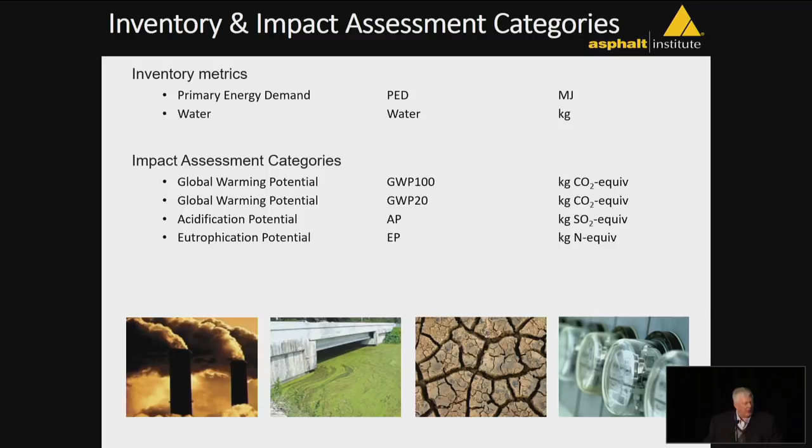As Katie mentioned, one of the major ones is global warming potential. There's a GWP 100 for the 100-year global warming potential. There's a GWP 20 for a 20-year global warming potential, acidification potential, eutrophication potential, smog formation potential. So all of these things are reported out of an LCA.

If you look at our product, we said, okay, what are we going to study? What's this study going to cover? Well, first, we're looking at a typical neat asphalt binder coming out of a refinery without any additives of any kind. We also wanted to address not only refineries, but terminals. A lot of the asphalt here in North America is sold through terminals, not necessarily directly from a refinery, and there are certain things that are put in at terminals.

So we wanted to look at an asphalt that was modified with a styrene-butadiene-styrene polymer. We looked at one that was the terminal blend process, one that had ground tire rubber added to it, and also one that was modified with polyphosphoric acid. We felt these additives were things that were typically done at a terminal or at the refinery, not done in a hot mix asphalt plant.

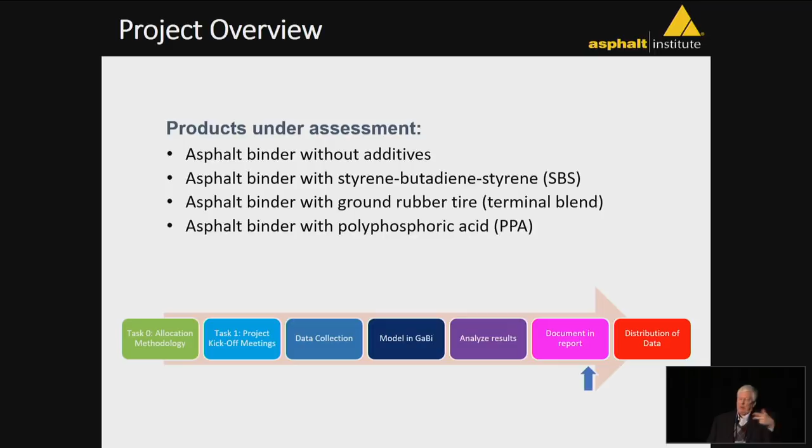If you look at where we are across the timeline, across the bottom here, starting from when we had our kickoff meeting, data collection, we're right now in the final phase. We have gotten an interim report, final report, and we're having that addressed by a critical review panel, and we're addressing those comments at this point.

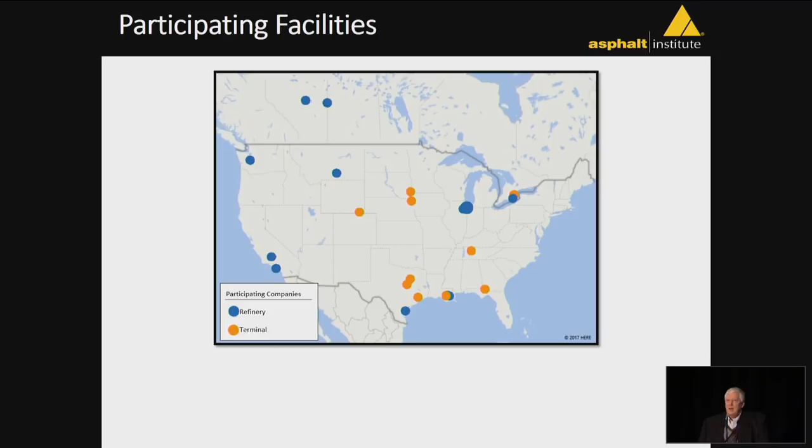There's a map giving you a representation of North America. We had a relatively good distribution. In terms of facilities, we had 12 refineries from 9 different companies. That represents about 35–40% of the total number of asphalt refineries in North America. And we had 10 terminals from 4 different companies.

Okay, if we look at this allocation now, looking at the refinery and all the co-products that come out of the refinery stream, how do you account for that? How do you allocate to asphalt its true fair burden? Under ISO, and this is an ISO process, there's a number of ways to do this. The primary one and the most favored one is subdivision.

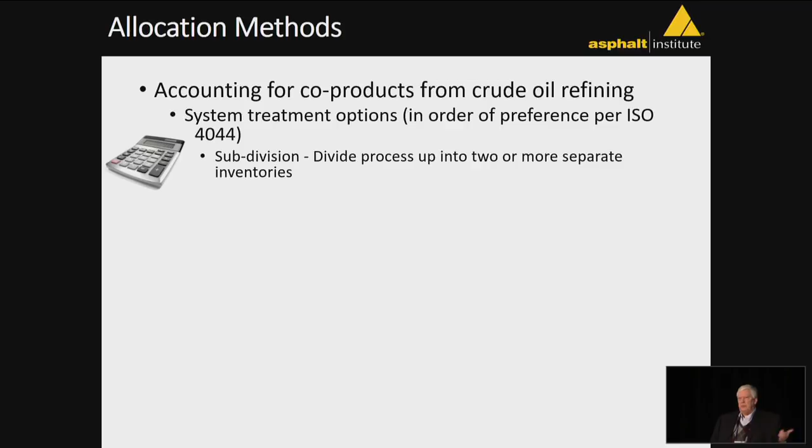Divide the process into 2 or more separate inventories. System expansion by substitution - this one doesn't work at all here. We can't substitute something else for asphalt, so that one doesn't work. If you look at allocation, that was a methodology, and it's third in line, so it's the least favored methodology by ISO, but that is the one that's been used in all of the previous studies for asphalt LCAs.

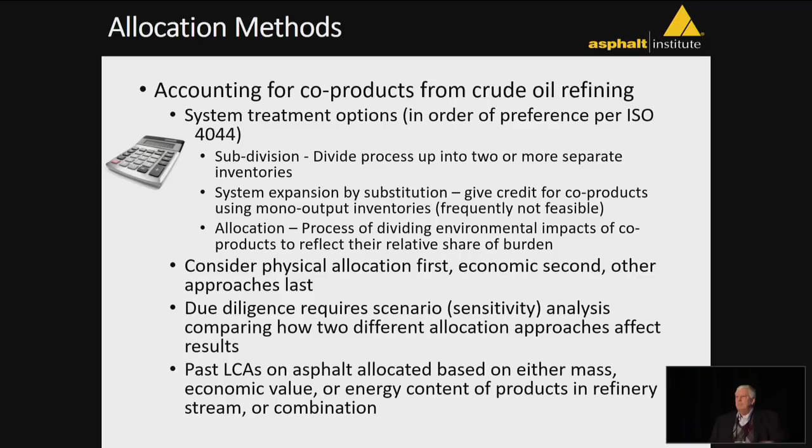So you can consider when you're doing allocation, you can look at by mass, by economic value, or by any combination of those. Mostly in the past, it was all based on allocation method. If you look at our study, we did electricity by allocation based on mass, crude oil by energy content allocation, thermal energy - and this is where we've differed from everyone else.

We did a subdivision rather than allocation based on simple thermodynamics. Every other product coming through that refinery stream, as I said, is vaporized. Asphalt is not. The only energy going into asphalt is the energy required to raise the temperature of that crude oil from the temperature in the storage tank of crude oil to the rundown temperature, the exit temperature of the asphalt actually coming out of the refinery unit. All that uses is sensible heat. No latent heat involved, which is a factor that's required in every other single refinery product. So we base this on simply thermodynamics, on how much energy does it take to raise the temperature from the crude oil temperature up to the asphalt temperature.

Direct emissions, again, this was allocated on energy use. So if you look at a comparison here of former studies, Eurobitume used crude oil by mass. They used an economic analysis on electricity and thermal energy, again economic, but it was all done on allocation method. The GaBi database that you see up there, that is an international database that has been put together by the consultant company we used on this project, ThinkStep. And in the past, all of their methods, their allocations were done, again, using the allocation method using mass. So this is the big difference in ours, the fact that we're now using a subdivision.

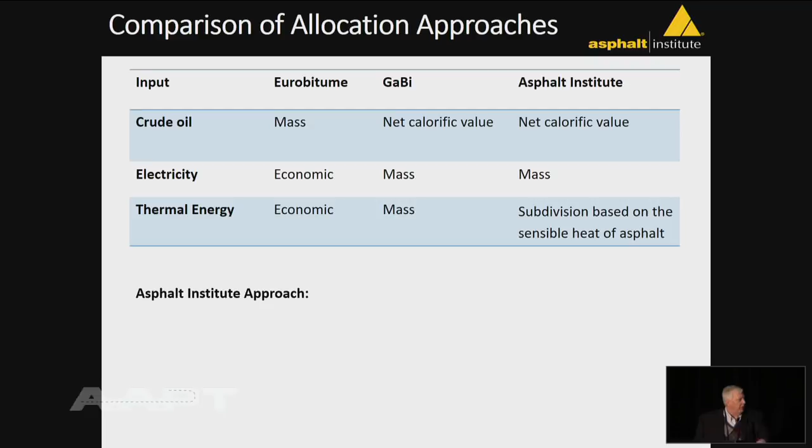Okay, I'm not going to go into calculations. Sensible heat, latent heat.

We looked to validate. ThinkStep said we really can't put this forward unless we can validate this. Every refinery has an extremely complicated and proprietary model that they use to simulate the processes going on in those towers, and they can calculate all the inputs, outputs, energy required, all of those things. So we wanted to try to validate this very simple approach against somebody using that process simulation software.

One of our companies volunteered to do that, not only at one refinery, but two. They ran their process simulation model and said, here's the inputs and outputs if we run 10,000 barrels of asphalt, and here's the same study if we don't run any asphalt at all. What's the difference? When we compared that to the simple thermodynamic approach for production of 10,000 barrels of asphalt, we were within 1% of the process simulation software. Based on that, ThinkStep said that's certainly accurate enough, and we moved forward with this approach.

Well, what were the results? A number of surprising things as far as we're concerned. If you look at which part of the equation drives it - again, our basic boundaries for this study start at the wellhead, from getting the crude oil out of the ground, to the terminal gate or refinery gate, wherever the contractor is picking up that asphalt.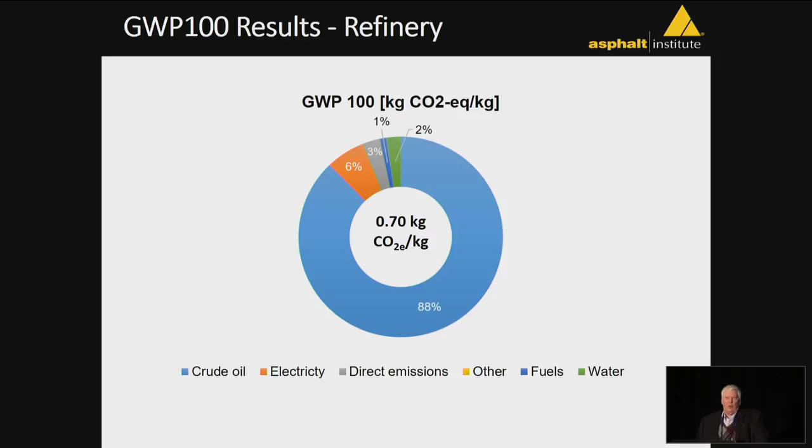And if you look at what provides the largest component, that big blue circle there is crude oil. The impact of extracting the crude oil and transporting it to the refinery, especially in the extraction process, is by far the largest component.

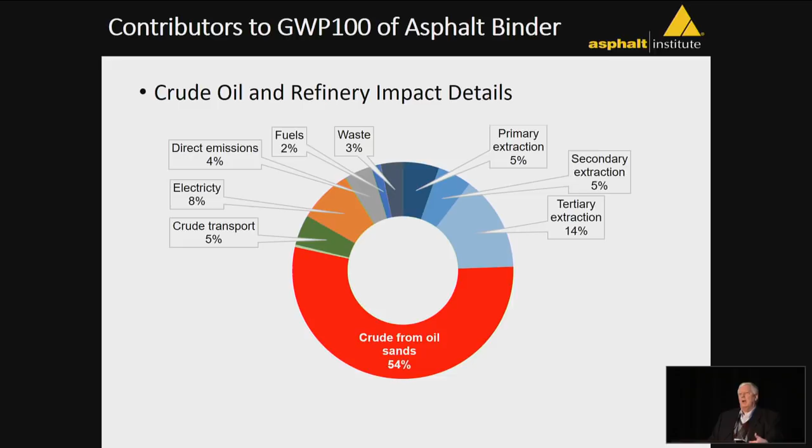And what drives that depends on what type of crude oil you're looking at. If you look at the bottom there, the red part of the circle, crude from oil sands - 54% of the participants in this study said they were running crude oil sands as their primary crude source for making asphalt. And if you don't know, the energy required to extract that material from the ground, wash the oil out of the sand, and go through all of that - it is by far the most energy intensive crude oil you can possibly use.

If you move to the next step, tertiary extraction, now we're talking about crude oil that's so heavy it requires some assistance, whether it's steam extraction or steam injection, to get it out of the ground. So if you look at most of the crudes in this study, unfortunately it was the ones that take the most energy to get, and that was the biggest factor in our final number.

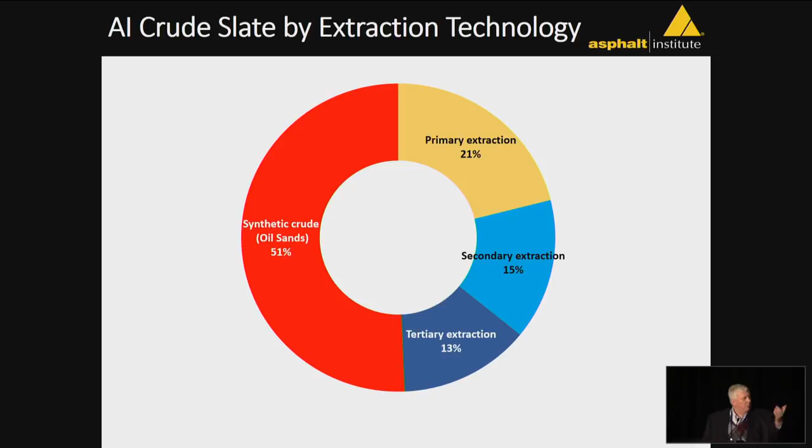So where does that put us for the numbers for global warming potential for the 4 different asphalts we considered? If we look at just plain asphalt, global warming potential is 0.68 kilograms of CO2. If you look at asphalt with ground tire rubber, since we've got a recycled product, we get credit, so it actually lowers the number by almost 3%, down to 0.66. If we look at PPA, that increases the number by 2.9%, up to 0.70. And if we look at SBS, that one bumps us up by 19%, strictly due to the impact of producing the SBS polymer we're using.

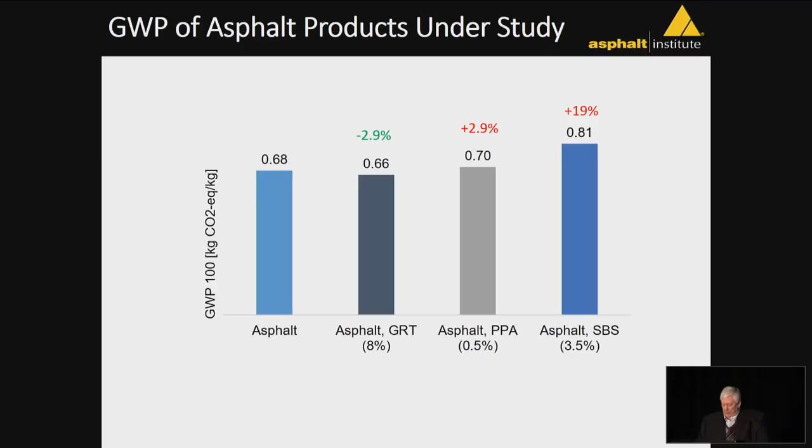We look at the relative contributions to the numbers we ended up with, across global warming potential, energy demand, acidification, eutrophication, and smog formation. Crude oil is the largest contributor by far in all of those, especially energy demand, because of the amount of oil sands involved.

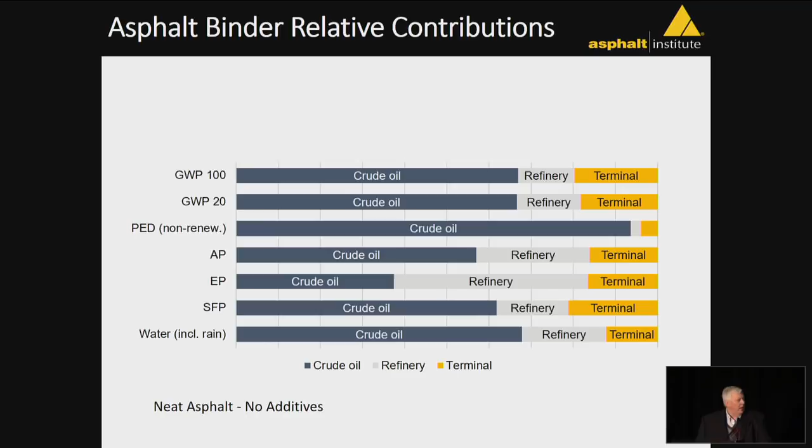The other thing to note is that terminal operations are not insignificant - they can be a substantial number. What you need to know is that the Eurobitume study included no terminals, perhaps because everything is sold directly out of a refinery in Europe. I don't have knowledge of that, but they did not include any terminals. Previous studies, including the one used by NAPA, also did not include terminals.

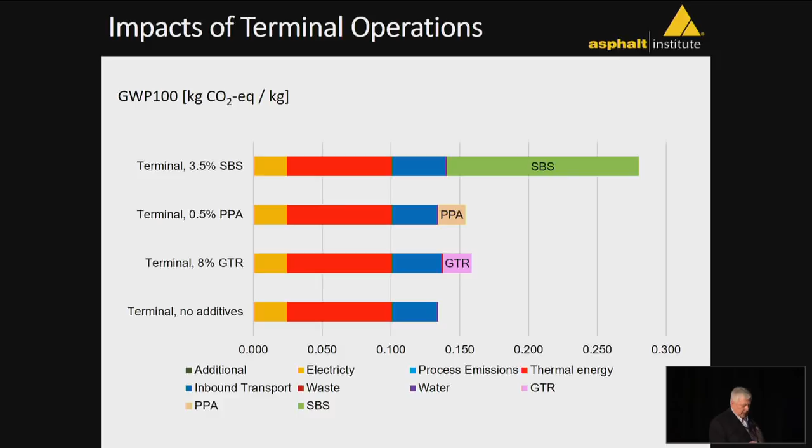That's something that really needed to be included. If you look at the impact on terminal operations and where the biggest contributor is, SBS adds a substantial number to the terminal process. Most of the terminal numbers are based on thermal energy - the energy required to keep the asphalt hot in the tanks, very simply. Thermal energy is certainly the biggest factor, and transportation can also be a big number for some items. Thermal energy and transport together add up to quite a bit of influence on terminal operations.

So we benchmark against previous LCAs or LCIs. You can see where we stand versus the Asphalt Institute number and Eurobitume - this is U.S. bitumen under the GaBi database, using the average U.S. crude slate, which does not reflect the crude slate our members are actually running, and the NAPA tool is in here too. Our number is higher, mainly because of the crudes.

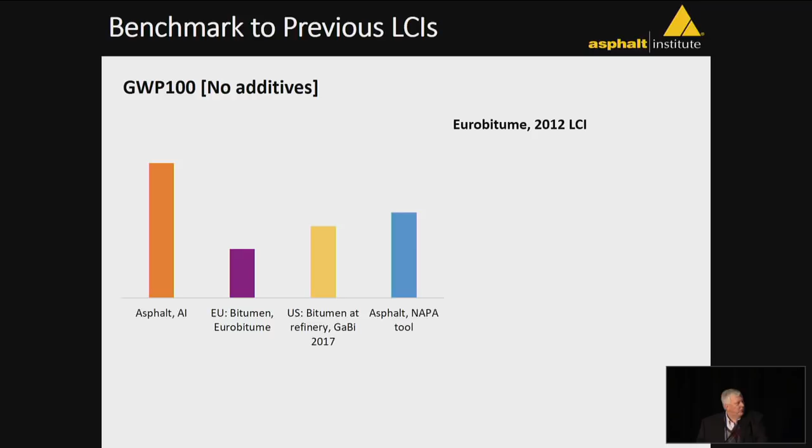That was a concern for us, and for NAPA when we started leaking out information. We don't have a final report yet, but we know our numbers will be higher than what's been used in the past. That's not where we want to be, certainly, but the reasons are mostly due to crude slate, and the fact that terminals were not included in anybody's study previously.

Eurobitume has been revising and redoing their LCI over the past 6 months, and they are now using the subdivision method, the thermal energy method that we're using. They've gotten buy-in from Concawe, and we got buy-in from API. So now one of our goals has been reached - we have complete agreement between ourselves, API, Concawe, and Eurobitume on using this approach for determining the LCA for asphalt.

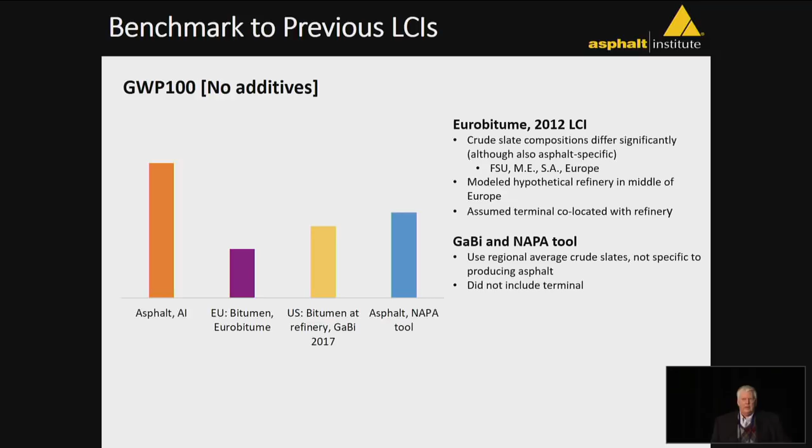Again, the GaBi tool previously and the NAPA tool both used an average crude slate and didn't include terminals, which is the biggest difference.

ISO does not require a critical review panel, but we decided to go that route. We have a panel of 3 experts in the industry. We sent out the initial report and they had hundreds of questions and comments. The contractor, ThinkStep, has been addressing them and is almost finished, but some of the early comments caused ThinkStep to go back and relook at some things. We immediately saw some reductions based on errors the critical review panel caught, or differences of opinion - some relatively minor, 6 to 8%, 17%.

But for ozone, there was an 82% drop - that's pretty substantial. So we're looking forward to the final report, probably within the next 30 days or so. Looking at other numbers, we're still seeing total reductions, and we could actually see lower numbers yet when we get the final report.

The first time I put this slide up, I got chewed out by some folks saying you can't compare asphalt to concrete. Anytime you're looking at these kinds of numbers, you have to look at the product category rule and the boundaries people pick - if they're not identical, these numbers mean nothing. But we wanted to benchmark ourselves, assuming we're pretty close between our boundaries and what the concrete industry is doing, and just see where we stand.

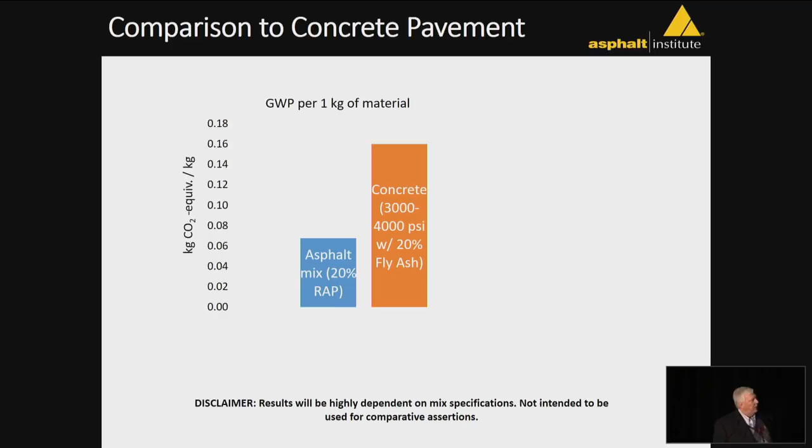We know our numbers are higher than numbers used in the past - does that really hurt us that much? If you look at our numbers, this is a mix containing 20% RAP and 5% asphalt binder, and the numbers for concrete came directly from the National Ready Mix Concrete EPD. We feel pretty good about that - our number here is 0.068, while theirs is probably double us, at least double us.

Now people say you shouldn't do that, not allowed. ISO says you can't do that. Industry experts say that. But states and agencies are starting to use this stuff, and they already use LCCA to compare the two products. And I can promise you that someone somewhere is going to try to do the same thing here.

So even though this isn't kosher, I did it anyway to give us a benchmark. The other thing is, you look at these numbers and say, based strictly on the material, there's no way, because we know that cement is the second largest contributor of CO2 in the world, only second to power plants, that on the material side they can compete with us.

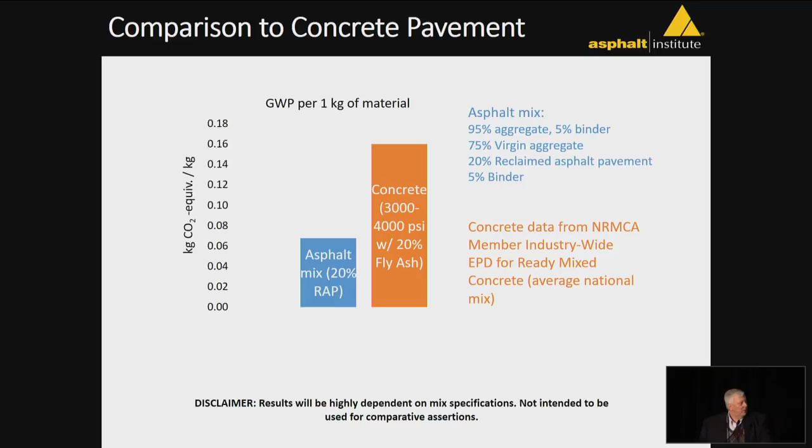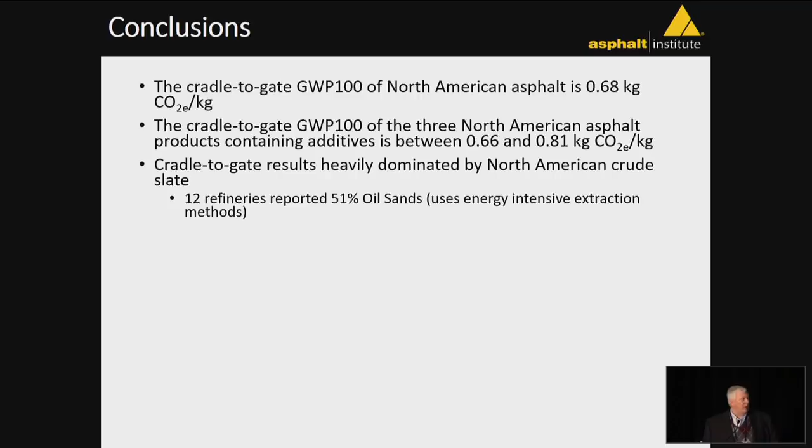Okay, conclusions. So we went cradle to gate, starting at the wellhead. So we're looking at 0.68. It varies from 0.66 up to 0.81 depending on the additive we're putting in. It's mostly dominated by the crude slate, and that crude slate was specific to our refineries. And of course, ours did include terminals, which hasn't been done before.

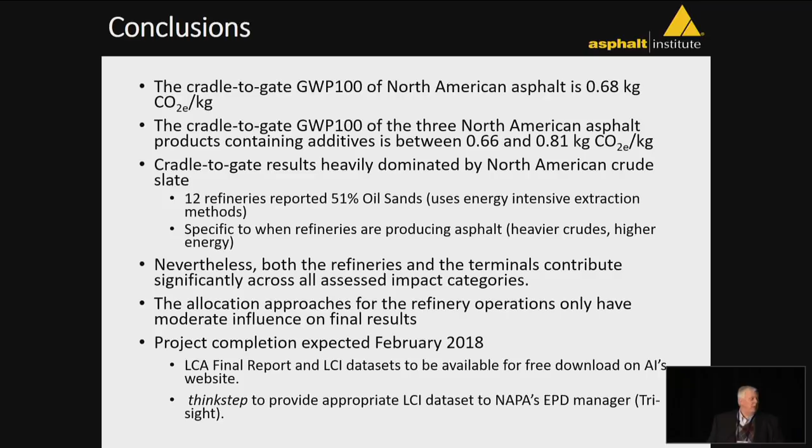And it says February, we're already past that. We're still, our contractor's still addressing some critical review panel comments, so we'll move that back till April. But anyway, at this point, we're looking to have it completed soon. So with that, thank you.